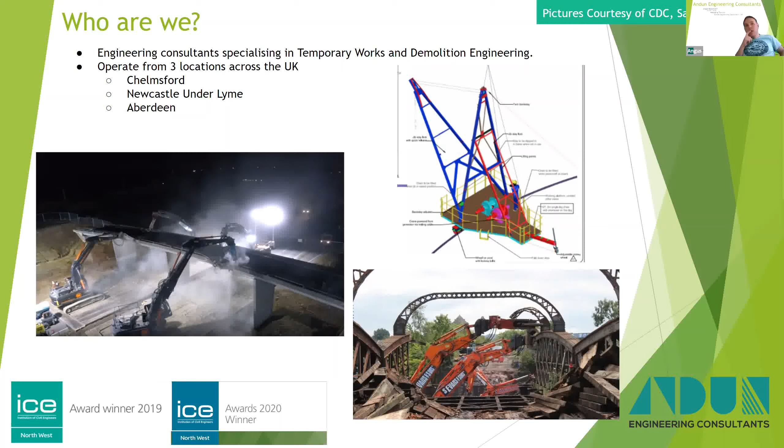So bridges, they can be from something a metre in span, which is probably more like a culvert realistically, to structures over a mile in length. We've never taken down anything a mile in length. We've done structures up to sort of 250 metres long, viaducts generally. When you start getting the bigger single span structures, you either take them apart the way you put them together, or you use explosive demolition. But we haven't been involved in anything that size yet.

The materials bridges are made from can dramatically impact the way in which you demolish them. Just looking at concrete, you've got precast sections, which started appearing in the 50s, 60s, 70s. You've got in situ concrete, which can be mass concrete or reinforced concrete. The first mass concrete structure I can think of, well, if you're not looking at bridges specifically, go back to the Pantheon. But if you're thinking bridges, you've got things like the viaducts up on the Mallaig line in Scotland that McAlpine built. That was done in mass concrete and is still in good condition because it doesn't contain any reinforcement to corrode and start the destruction of the concrete.

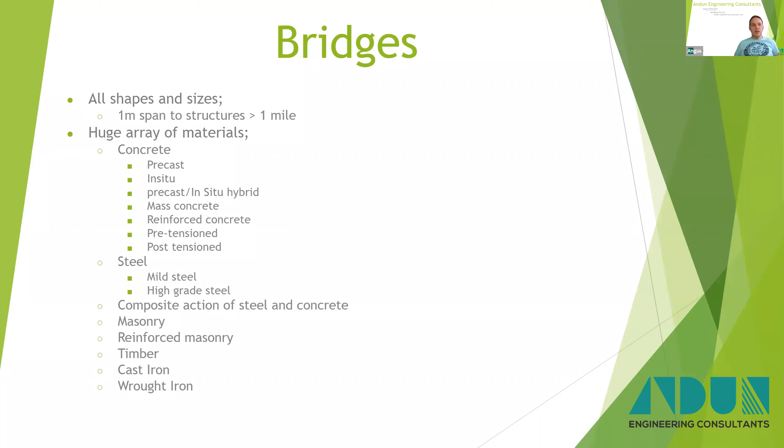Now, the constraints. This is just a little list I put together today thinking about what sort of things affect how we come up with the demolition methodology. You've got railways over, under, road over, under, rivers - I haven't even put that on but I have it down the bottom there, river underneath it. The height of the structure, so that has two effects.

One of the case studies shortly is a structure that's very, very high up in a cutting above a railway line. If it's normal height, say 5-6 metres up, you can use normal demolition methods where you protect the track, bring a machine in and demolish the structure. If, for instance, the structure is 20-30 metres above the railway line, it becomes a different question how you demolish it, and indeed how you would protect the railway when you're demolishing it.

If you've got lumps of rubble dropping 20 metres, there's an awful lot of energy to dissipate before it hits the crash deck. The condition of the structure can have a massive impact on how we demolish it. If the structure is in a condition where you can drive on it with plant or vehicles, then perhaps that makes it easier. If it's in such poor condition that it's failed or is failing, then you've got to come up with another way.

Time, particularly with rail jobs, there are huge penalties if we overrun our possessions - that's the time we're allowed to work on the railway. So the methodology can often be dictated by the speed in which we need to complete the works. Similarly with a road closure, there's only a certain amount of time we can close a road for. The time of year matters too - Christmas, Easter, August bank holidays, May bank holidays are traditionally when we can get these road and rail closures in place, but it's a limited time.

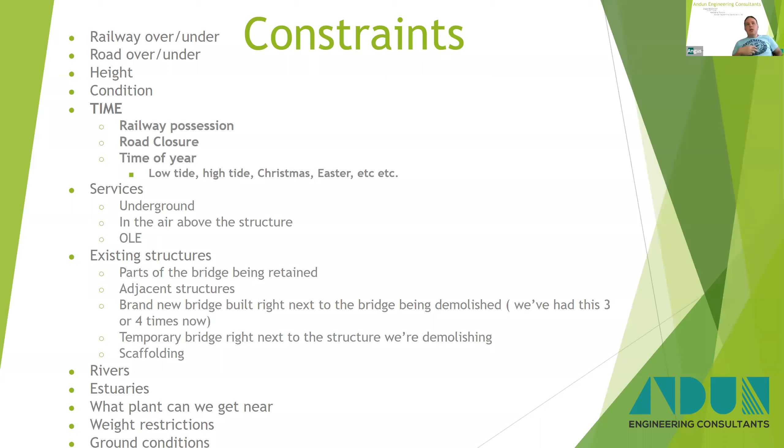When I was going back through looking at the bridges we've done, I thought this one here, Langton Court in Bristol, is quite a good example of constraints and how it dictated the methodology. In fact, it's the best one I could see, really. This was a fairly small job, and if it had been in a better location, it would have been really quite simple. But we had a lot of constraints.

The first constraint was high voltage cables, which went directly over the top of the structure. The next is the height above the railway - I think we were about 30 meters above the railway here. You've got a railway underneath it, a set of points or switches underneath it, and signalling apparatus underneath it. It's also in a residential area with fairly narrow roads, so the approach and access for plant was far from ideal.

I meant to add at the beginning there, we were working for Sam Gilpin Demolition on this scheme, who were in turn working for Hochtief.

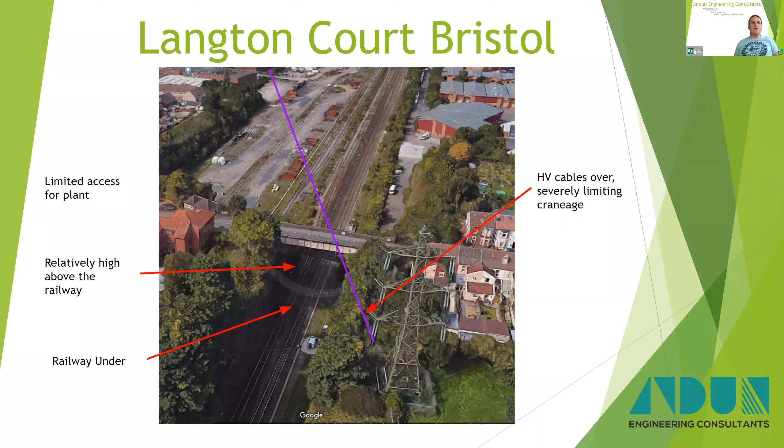So looking at it in plan, the pink dotted line is the high voltage cables and the associated exclusion zone. And the only bit we were moving was the steel walkway here.

This steel walkway spanned from a support here to a support here, and we could only get small plant near it. So the scheme we came up with was to put supports on the bridge itself, on the masonry arch, and suspend and hang the steel structure.

So in cross section, we've got a masonry structure that this is sitting on, and then we had this steel footbridge projecting. Now, if we could have got a big crane near it and there were no high voltage cables overhead, it would be easy to pick it up and move the bridge in one piece. But we couldn't, so we suspended it here.

Fairly lightweight structure, but still heavy enough, given what we had to do. So we put these supports in first, suspended the steel deck, and then cut it apart in a controlled manner that was all analysed and demonstrated to work.

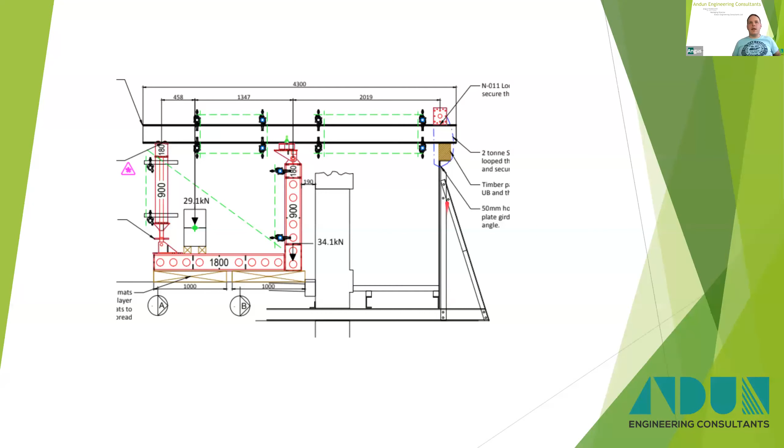If you go back a phase, you can see you've got an edge parapet beam there, which was formed out of steel plates. So you had angle at the top, and angle and T-section at the bottom.

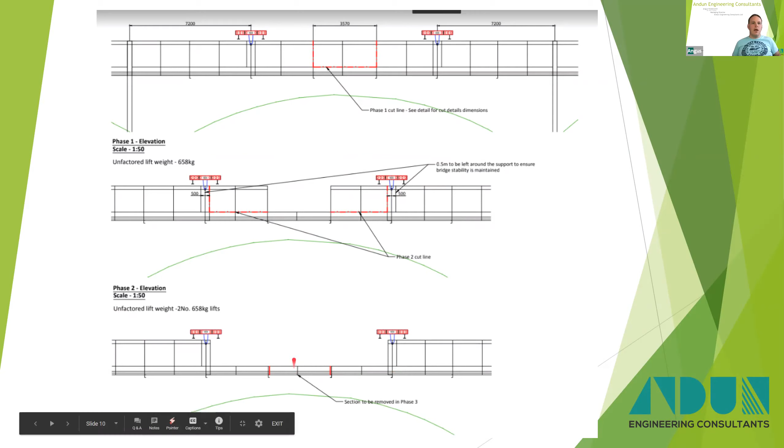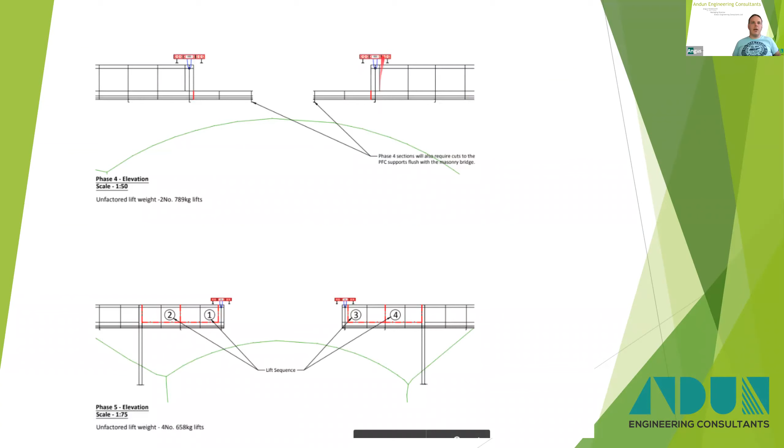So we could cut it out, and we left the bottom section spanning across and took the top of the panels out. Then we lifted out that section and the next section and so on, until we worked our way back to the bridge being supported here and hanging from the hanger there, as you can see. Then we lifted the final pieces out, working our way back.

The sides of the cuttings were remarkably steep, but they were into competent stone, so we could put a little support in there and complete the demolition sequence.

Though it probably looks a lot easier on paper than it did in practice, it really was quite a tricky little scheme, with access problems for the site teams to get in and undertake this burning in a safe manner. So it was quite a tricky scheme, really.

But it gives a good indication of constraints and how they affect the demolition methodology and how we undertake the works. So let's leave the constraints for a minute and look at the methods that can be used.

Broadly speaking, there's cut and lift, traditional demolition, or explosive demolition. So if we start off with cut and lift, the mechanisms or systems we can use to cut material...

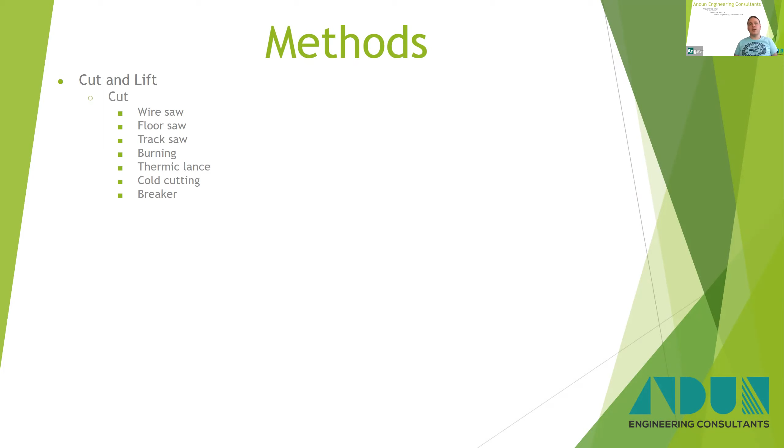For concrete, steel, cast iron, pretty much any material you can think of, you can use a wire saw, a diamond wire saw. Other brands are available, but this is a Hilti one, and the wire itself can be changed to suit the material you're cutting.

As I said, you can cut pretty much anything you want, typically used on mass and reinforced concrete, and they give quite a nice, neat cut when they're done, though they are not without their issues.

For instance, if you're cutting longitudinally down a beam, it will tend to take the route of least resistance and follow the reinforcement rather than trying to cut through it. So depending on the accuracy of the cut you're trying to achieve, that's worth bearing in mind as a permanent works designer - we need some tolerance when it comes to demolition.

Especially if we're trying to retain part of a structure, these things are good, but they won't cut a dead straight line every time you want.

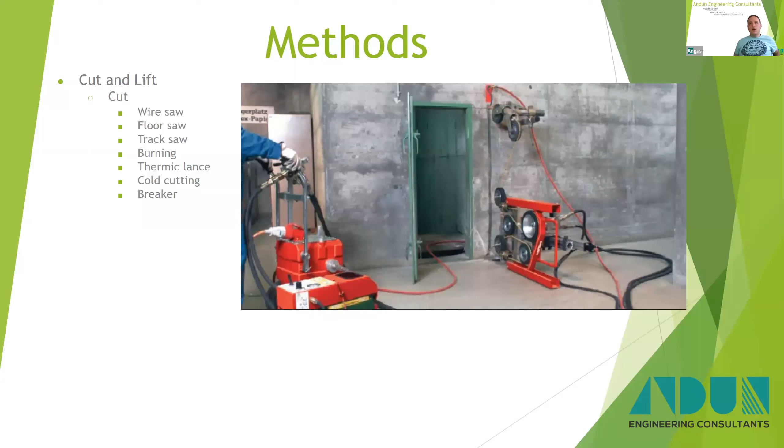Floor saw - I think this is the biggest one in the country, or Corecut claims the biggest one in the country. It's just like a big circular saw, but for concrete. It's a steel disc with diamond tips. Again, this will cut steel, reinforcement, concrete, and it'll even cut cast iron - yeah, I've seen it done. You've got a dirty great engine on there which drives this wheel as it's going along.

You spin the wheel up and cut down into the concrete, working your way along. The maximum depth it will cut is obviously from that centre there to here. If you need to go deeper than that, you're into wire saw cutting or some other means.

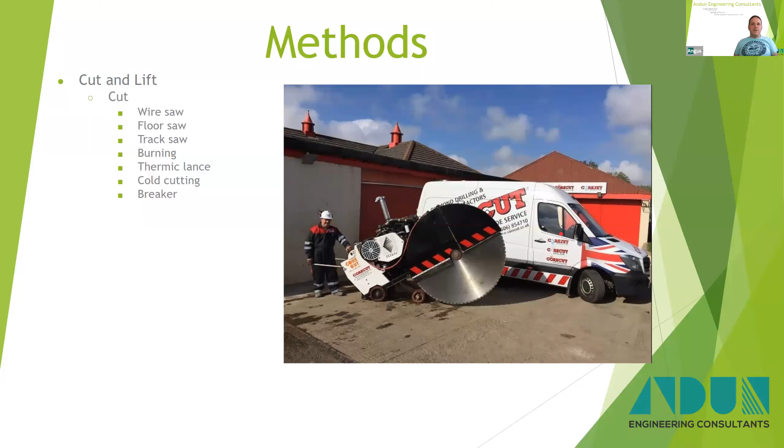Track saw is fairly similar, except instead of running on a wheeled system like that, you put a track down and run the saw along it. This one's got all the bells and whistles, so it's remotely controlled - the guy runs it from here, and it works its way along the track, cutting as required.

Hot cutting, so burning - this is burning through wrought iron by the looks of it. Given the construction it could be mild steel, wrought iron - say wrought iron given the construction. You can cut through wrought iron, you can cut through steel. You will struggle on cast iron.

You obviously won't burn through concrete with a gas axe, but that allows you to hot cut sections pretty much where you want. You've also got to be able to get there and gain access to do it in a safe manner, but generally speaking that can be arranged.

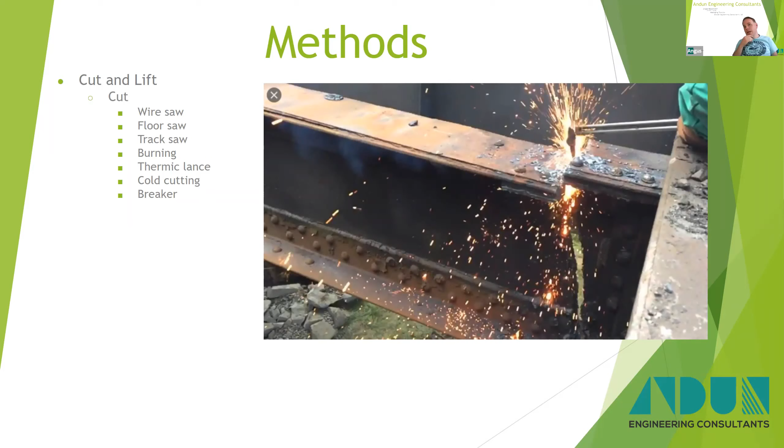Next one, which you don't see very often, is the thermic lance. Preheat the end - it's full of iron or mild steel tube. Inside it you put iron, magnesium, or aluminium wires, and you blow oxygen through. Once you heat it up at the end here, that will catch fire.

That will burn through anything you can think of - you can burn through concrete, cast iron, steel. You can do an awful lot of damage with a thermic lance, though they are messy, and the smoke that comes off them is horrendous. You don't tend to see them very often, but when you do, you really need them - they can do things that other systems can't even touch.

Also got cold cutting on the list there, but I couldn't find a good picture for it - things like recip saws and the likes with the right blades to cut. With those, you can cut steel quite comfortably.

If any of you watched last week's webinar on the gas holder demolition at Battersea, that was actually all cold cut. There was no hot cutting - there's tools available that allow you to slice a steel structure up quite happily into pieces with cold cutting, a combination of wire saws, handheld recip saws, and even handheld circular saws with metal cutting blades. Depending on what you're doing, it is available - so if you're in a situation where you can't use hot works, there are options for you.

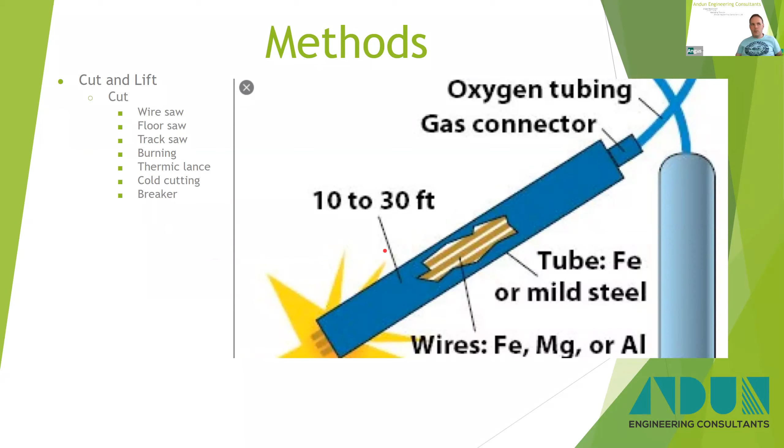And a breaker, I suppose, a breaker can go in there. Quite often if we're lifting out a concrete section, we need to get a breaker up there just to release the end. It could be a precast beam that had an in situ stitch or something similar, so you just break out the in situ stitch at the end, or around the abutment - it might have been in tarmac or whatever else. You might just need a breaker up there to tickle it free, shall we say.

And to reduce your HAVS, which is the vibration in your hands, you can use a Brokk, or you can do it manually with a breaker if you deem it's okay. There are options, or you can even do it with a large piece of plant.

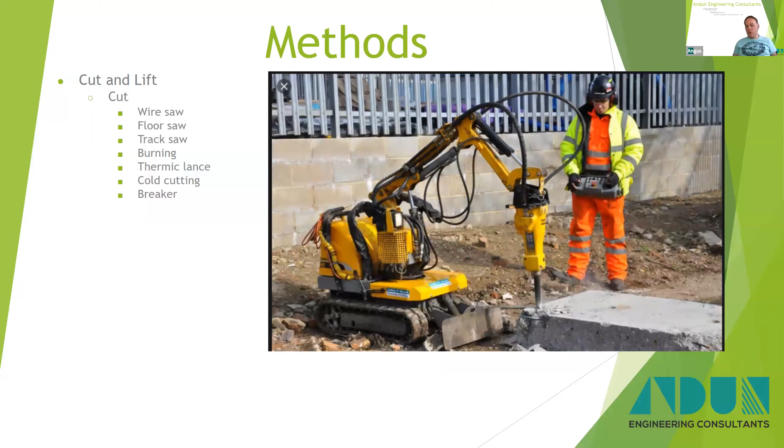So we've done the cutting side of things - what about the lifting side of things? There's any number of different methodologies available now for lifting things.

We'll start off with a simple one - that's a mobile crane, and that was at Twickenham station for Econ and Osborne, taking out the old footbridges and station bits and pieces. If you go there now, you wouldn't even recognise where that picture was taken - there's been a dirty great new station and mixed development built over the top of it, which has drastically changed the area.

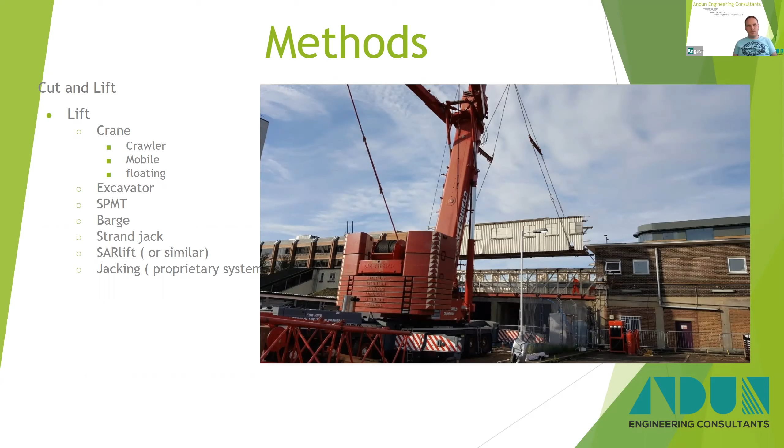Crawler cranes - that's CDC in Widnes taking down an old bridge that was made redundant by the new crossing up there. Again, a little crawler crane - that crane there can lift 100 tons, and at that point it's lifting 25 tons at something like the 20-meter radius. So they are real little pocket rockets in terms of the performance you can get out of these machines.

All self-rigging as well, so you haven't got to mess around rigging up the boom. Simple use of a propping system we put in there to allow to reduce the weights so we can lift it comfortably.

I couldn't really find a picture of a floating crane that made any sense in the demolition context, but you get the idea - you can put these on pontoons, etc.

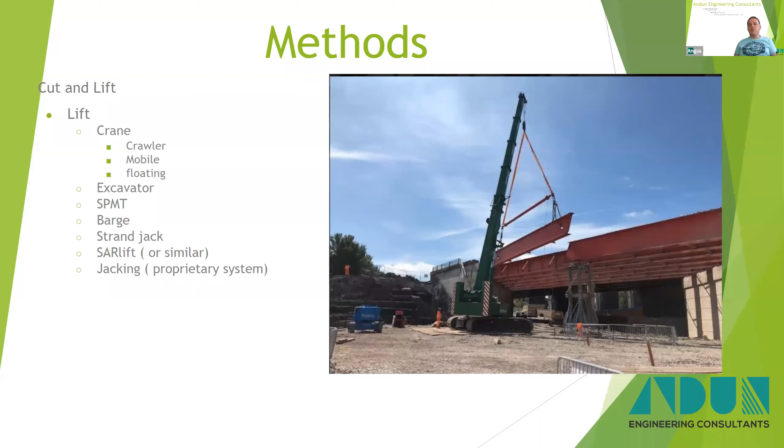And excavators - there's a little video coming up of an excavator being used for lifting, so we'll skip that one for now. SPMTs, self-propelled modular transporters - that's these kiddies here. So they're quite awesome bits of kit.

I think I've said this before, but if you've got time, just Google SPMTs on YouTube and have a look at the performance and what these things can do.

Here, this is Liverpool Churchill Way Viaduct, where we were taking out 2 spans in one. So you can see we've got a pair of SPMTs, and then we've used just a plain bed in between to lock them all together.

In this case, it was Sarens, and that's typically who we've worked with. There are other providers of SPMTs and all this propping gear, but we've worked with Sarens, and they're good guys to work with. They get the job done. They've got a good engineering team.

So that's SPMTs. Well, actually, I haven't really explained what they do. So in that case, you've got the bridge section sitting on top, and it can just drive out. In this case, it drove towards us on the screen and then drove to the left, or my left - not sure if that's your left. My brain can't think like that at the moment.

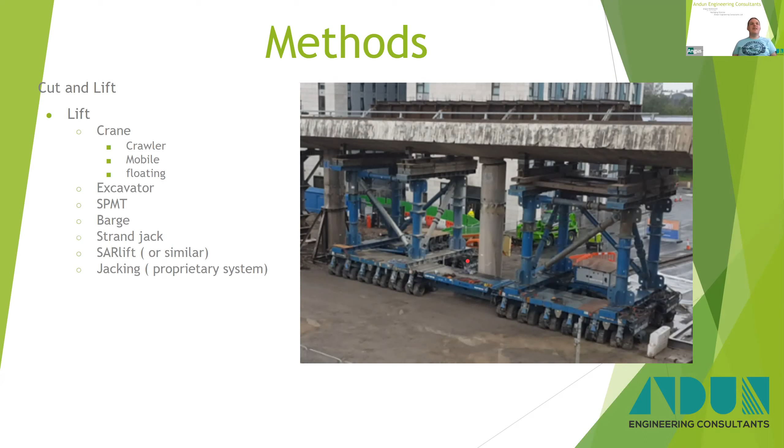Again, I put barges in there, but I couldn't find a picture. What I meant by barges is if you used a pontoon or a barge and you put it in underneath a bridge with packing or a jacking system on top, you could use the action of deballasting the barge or the pontoon, or you could use the tidal variation on a river. Though using the tidal variation on an estuary could be tricky because tides come with flows, so you'd have to make sure it was moored in place. But you could use that action to lift a bridge for you without cranes or similar.

Strand jacks can lift massive loads. I can't think we've ever used one on a demolition project, though I'm sure people have. Quite often used when building bridges, used a lot in oil and gas for moving heavyweight materials around.

SARlift, again this is a Sarens product. This is again at Liverpool Churchill Way, where we used it to jack up and down the bridge sections. The SPMT is driven in here, and then we lift it off, drive the SPMT out, and then drop it to ground level. Now in here, you've got a jacking system that allows you to raise and lower as required.

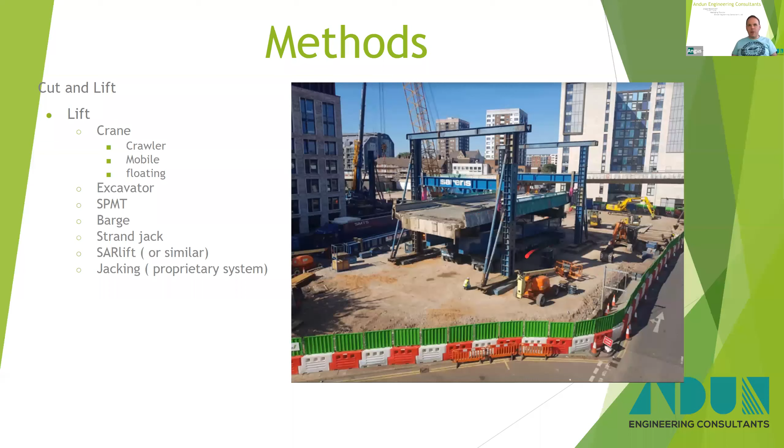They also have jacking systems, which is similar to this, but this comes with a tower built and the jack moves up and down inside it. With this system here, you jack up and you put another cassette on, and you can jack up and down a structure. Same kind of similar principle, but all of these things are available for lifting and lowering of structures.

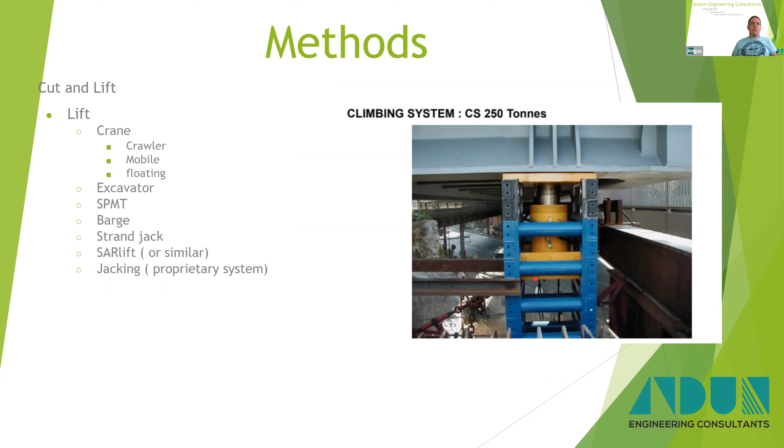This is - I talked about using excavators to lift things. This is a good example. I apologise if it doesn't look very good in terms of the quality, but that is my internet connection, I'm afraid.

How's that looking, Chris?

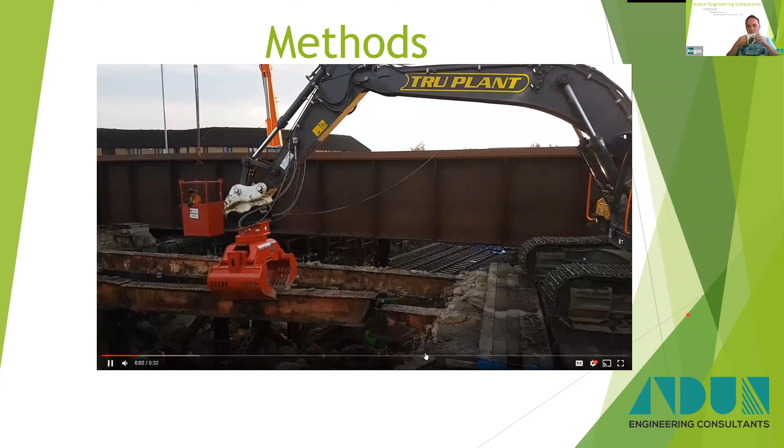Is that looking good, Chris? You're muted. Oh sorry, I thought I'd clicked the button. I was saying it's a bit jolty, but I think we can see roughly what you're trying to show, if that makes sense.

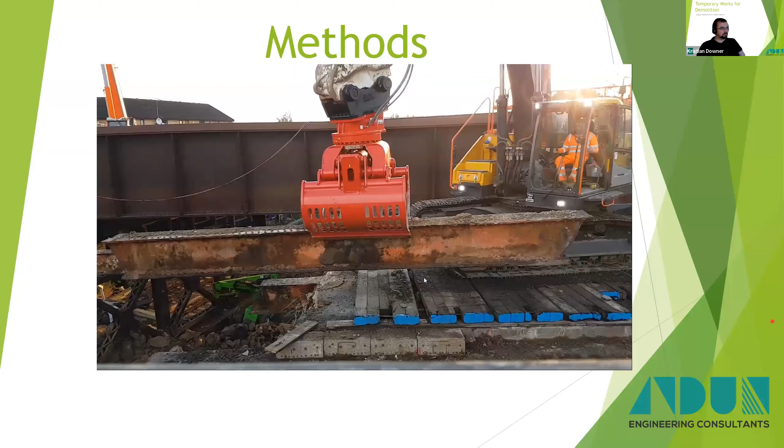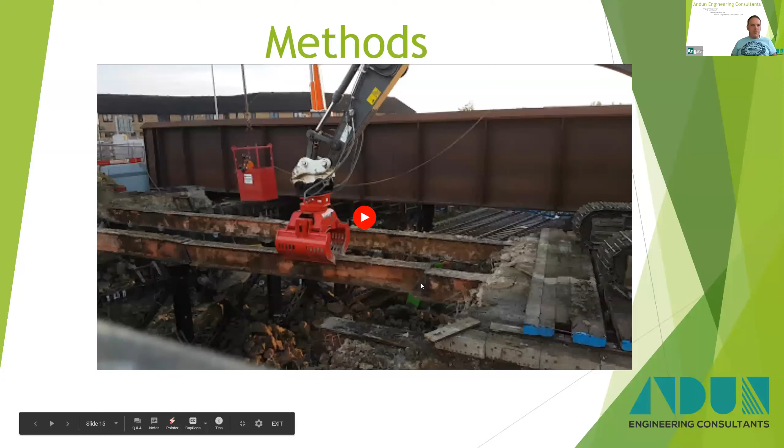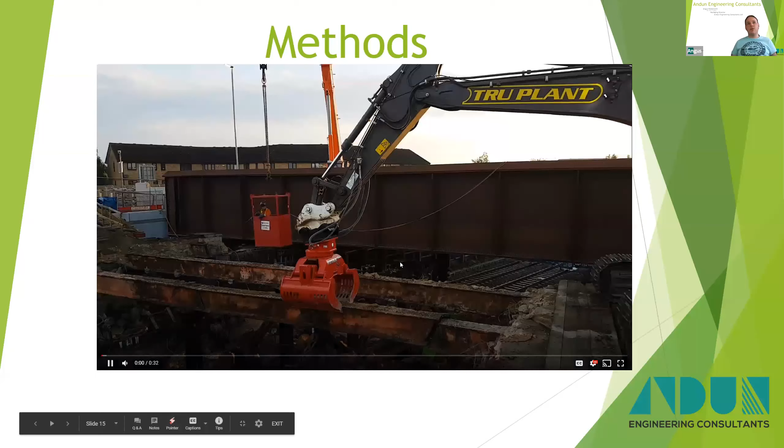So that was a rotor grab, on a 35 tonner, here on the other end of the beam, and then we're lifting out of the grab. Could have been done with chains, but in this case a grab was the correct solution. You see the guy in the background in the man riding basket. He actually did the burning from the man riding basket, which is quite a slow process, but given the constraints, there weren't many other options as to how we could do it. You can see it quite nicely held and dropped into position.

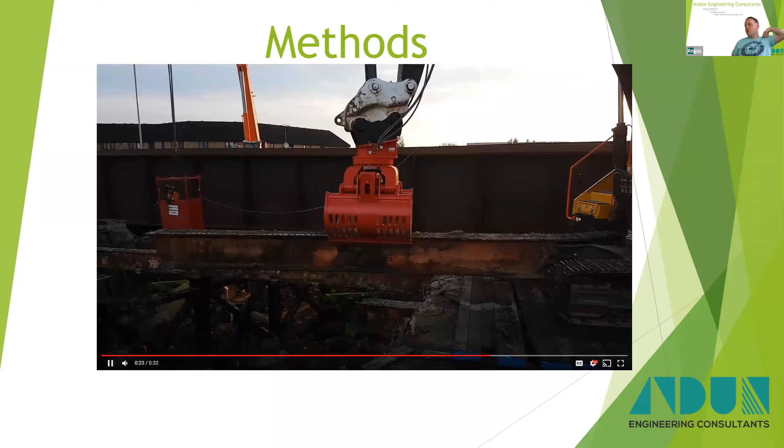So traditional demolition now, what methods have we got? If you're talking about steel structures, you want a dirty great shear like this. Some of these big shears can weigh up to 15 tons and they can pretty much go through anything you can get the jaws round. Incredible bits of kit. The shears we have available now, you can even use them on concrete, though it does wreck them, but sometimes to get things done, that's what you do. There are plenty of companies in this country who run shears, and there's some that run the massive great shears and can tackle pretty much anything.

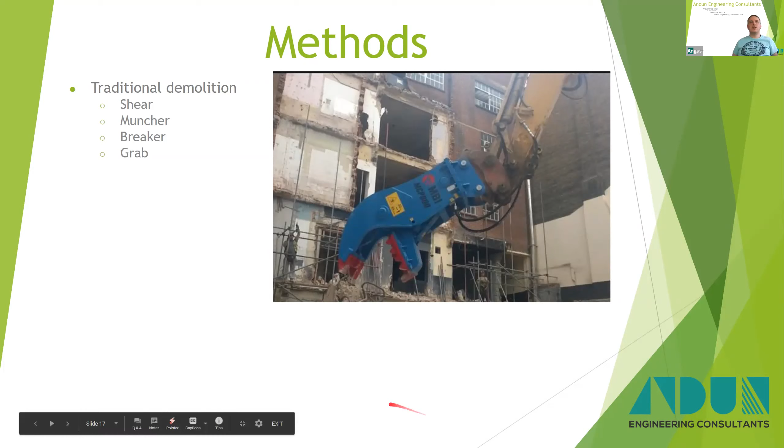Muncher, they're designed for crushing concrete, masonry, that sort of thing, generally speaking. Breaker, which is a big steel point on the end that impacts into the concrete and simply pulverizes it.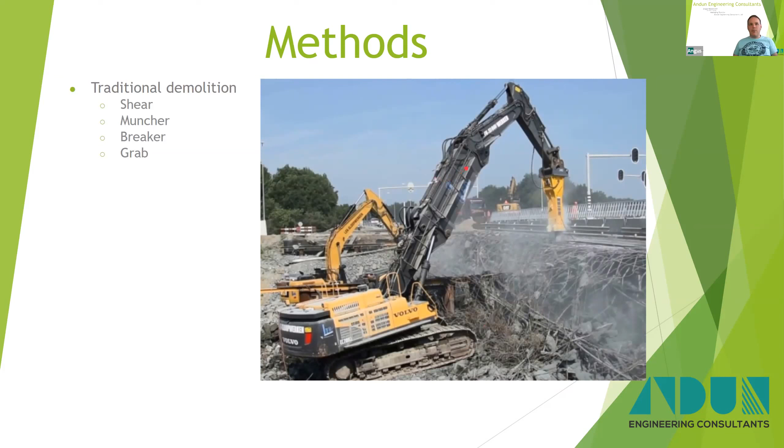And then we just saw a grab. There's a grab being used again to lift out a beam on the same bridge, actually.

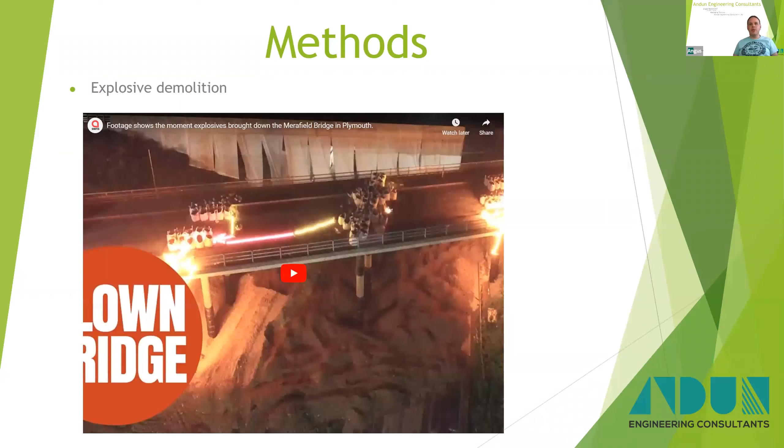And then we come on to the final general method, I would say, explosive demolition. If these aren't looking very good - you can find all of these videos on YouTube, not all of them, but most of them. This was Gilpin demolition on the A38. So you can see there the explosives being used to blow out the column heads and blow out over the abutments, and the whole bridge just drops to the ground.

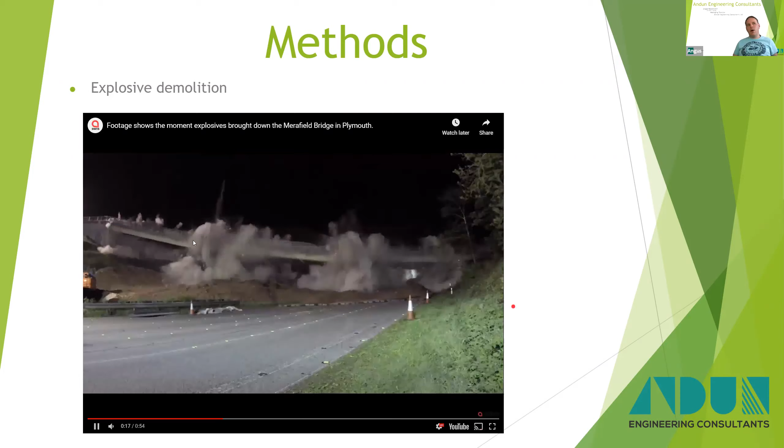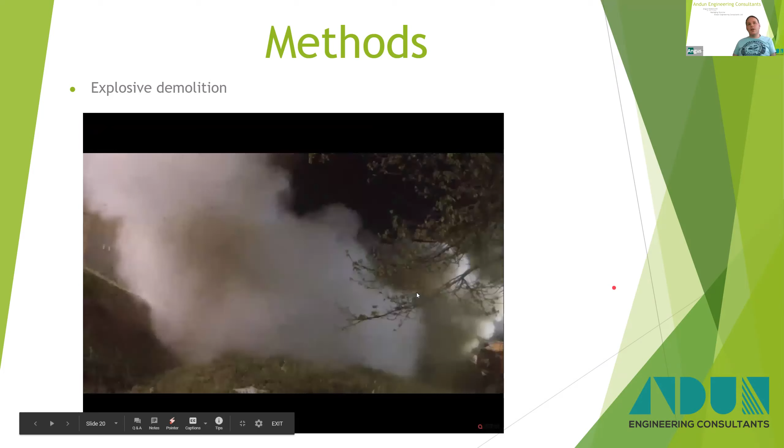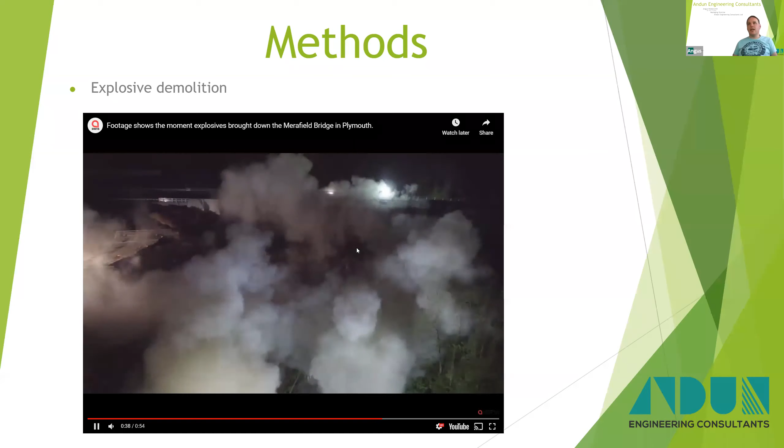Yeah, that one's a little bit easier to see, Angus. Good, so you can see all the bits and pieces. That's what we call flying off the deck. There's not a lot you can do. They've tried to protect the areas where the explosive is. You are always going to get some fly, so you've got to have exclusion zones in place. The benefit with explosive demolition is that the deck is dropped on the ground very quickly. You still got to break it up once it's down.

On that scheme we didn't do the explosives - that's done by a specialist contractor who actually installed the explosives. We did the protection to the A38 there to make sure that wasn't damaged.

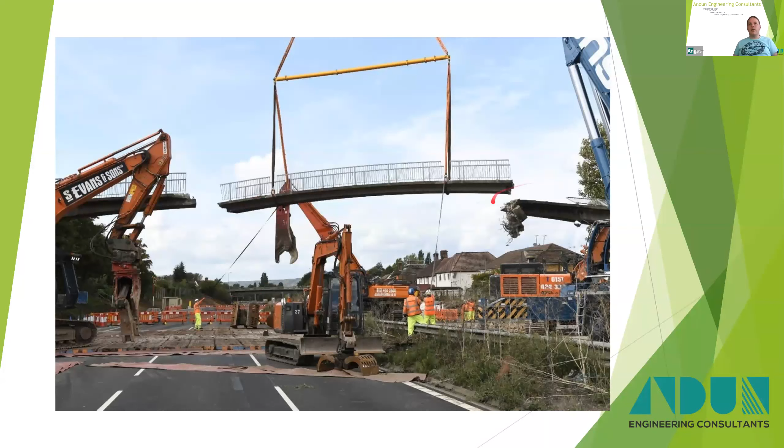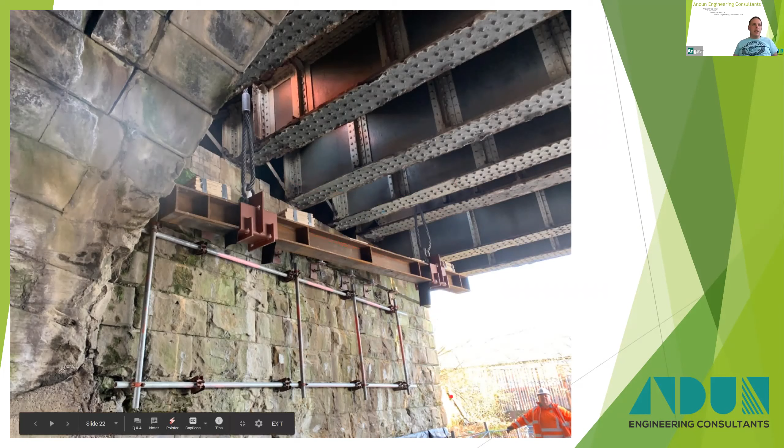I'll put that picture in there twice. I liked it so much, clearly.

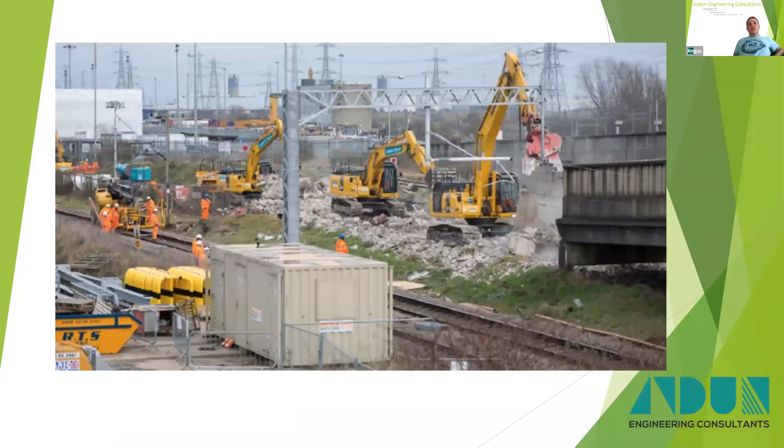This is a good picture of traditional demolition, I would say. So this is John F. Hunt at Barking Riverside, taking out one of the old access ramps that came down to facilitate the redevelopment of that area. Again you can see a 450 there running at a muncher, which they use just to pulverize and break up the concrete in a controlled sequence.

So, how are we doing for time? Not too bad. Okay, so now we're going to move on to some case studies, some small case studies.

Now this is Loughor Viaduct, where we were working for Sam Gilpin. I think this was back in 2013 - yeah, it was 2013, so this is a blast from the past, this one. And it was actually quite nice going back through the archives and looking at this job. I've forgotten quite how interesting the scheme was.

Loughor Viaduct was built or designed by Brunel, and was in service till 2013 with modifications throughout the years. Trestles were improved, but the original wrought iron construction was fairly early. Actually, I tell a lie - the trestles remained from Brunel, the deck was replaced at a later stage, and then it was in operation until 2013 when it was removed by Sam Gilpin.

Timber trestles supporting wrought iron decks. You've got four main members which were pretty much directly underneath the rails, and a ballasted timber deck - that was the structure. So that was a typical span.

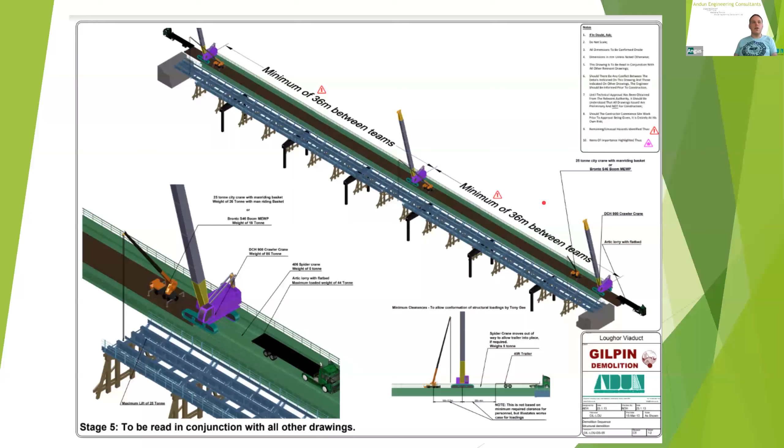In plan, that's basically what we did. We started the teams, one worked that way, another worked that way, and once the first span had come out, we then worked our way back east. Everybody was working east, taking out the structure, keeping that separation in place, and to maintain stability we used some Tirfors - quite a simple solution.

You might be wondering why we decided to take out the structure starting from the abutments. The answer is we didn't want to - I really didn't want to do that. However, Carillion needed to do preparatory works on the abutments while we were demolishing the bridge to meet their possession timescales. So we had to increase the risk involved with the demolition by removing restraints at either end, and work it in three individual sections, with stability maintained by tying to the permanent works.

One of the reasons this structure was being demolished was concerns over lateral or longitudinal stability. So it really wasn't ideal to have to do this, but we came up with a solution that allowed it to be completed.

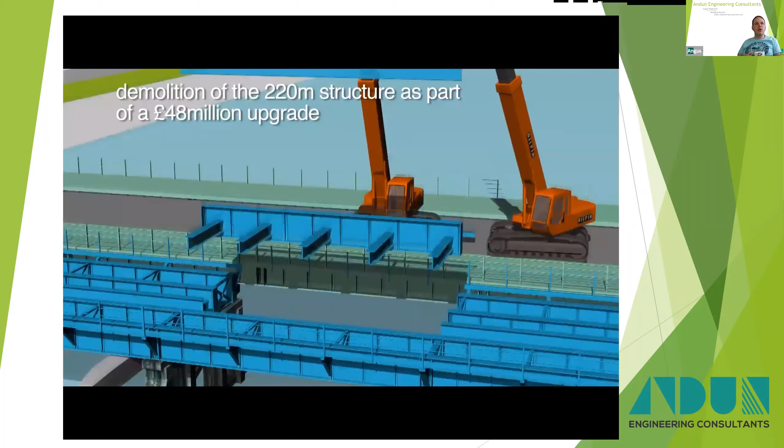So that's the new deck they're standing on. That's the old deck you're looking at there.

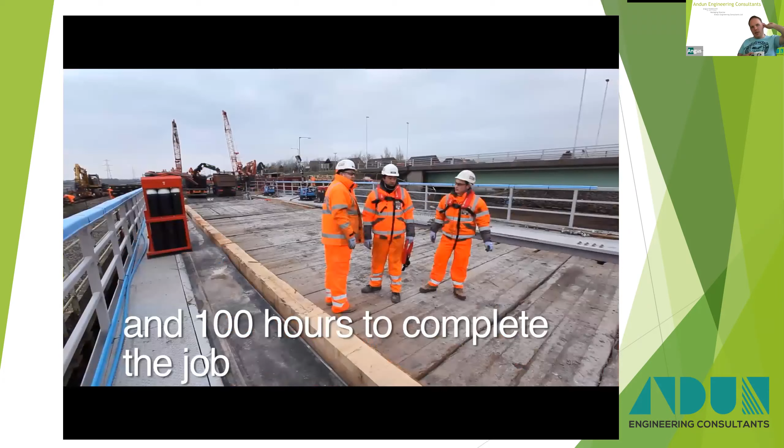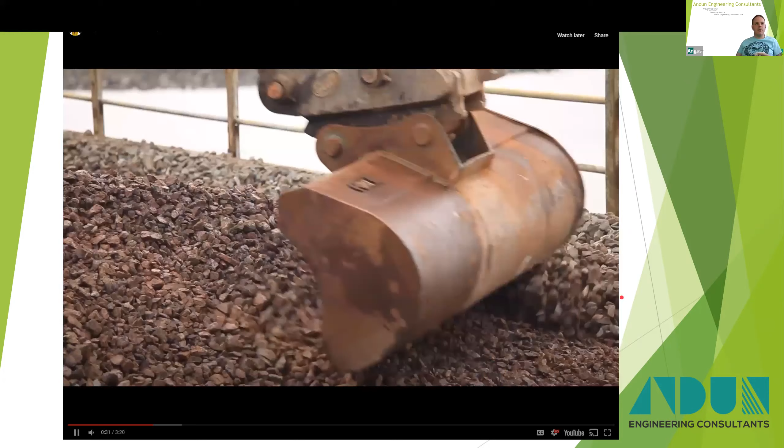First stage taking all the ballast off. And when I say that bridge was manky, I mean it was manky. We went underneath and did an inspection of that bridge prior to demolition, and it was bad - you could put your hand through the webs.

We've been in demolition for nearly 30 years, so it's been a natural progression from knocking down buildings and sheds in the quarry industry. We've evolved into the rail industry and specialised in bridge demolition and the marine aspect of demolition as well.

It does end up being a little bit of a Gilpin advert, but you still get to see some quite interesting bits on this scheme.

We're just about to start burning out the first girders now.

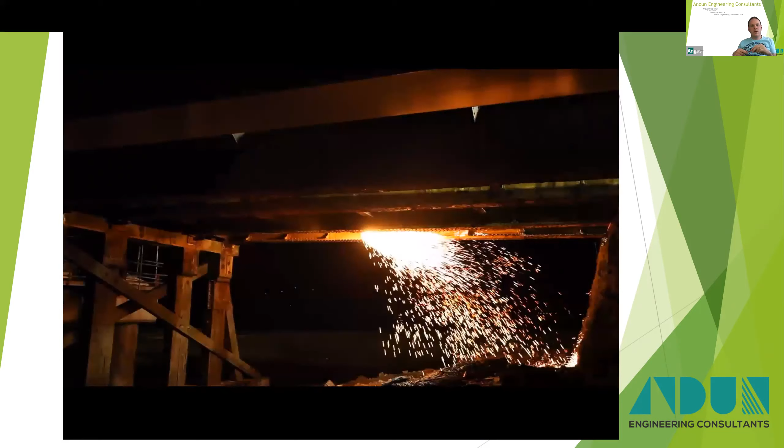Calculated by us, and it was about 10 tons, which was good.

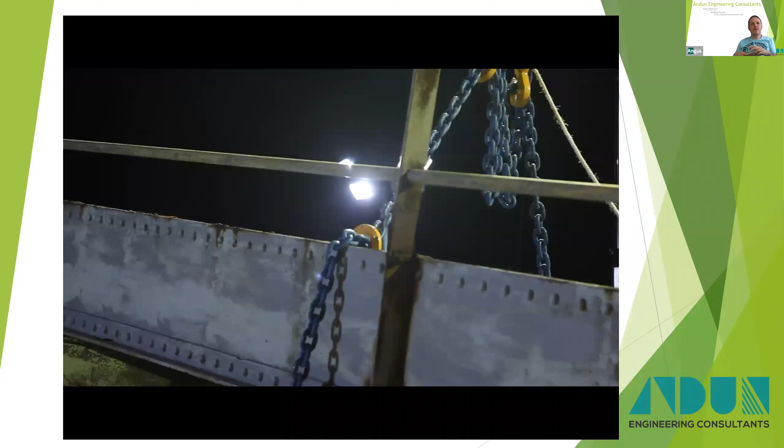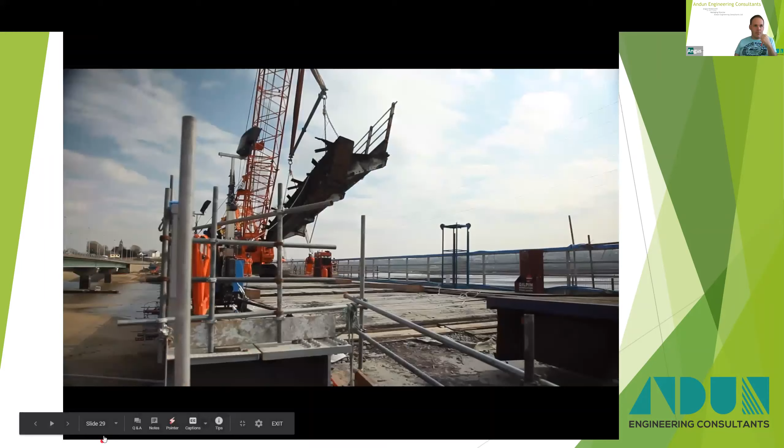So some of the sections were dropped onto barges, where we had the right tides.

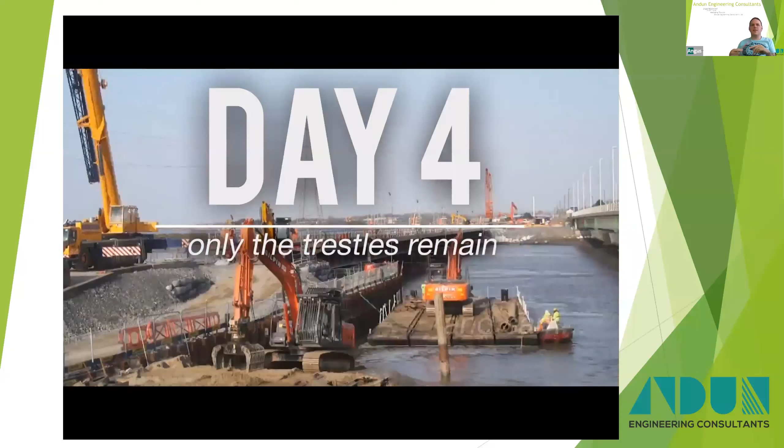You get an idea of how busy that site was when you see these views here, and how well they did to get that job done in under 100 hours. I think they finished 20 hours early - 25 hours early, there you go. Which was really some going, given the job they had to do there. And you can see the new bridge being slid into place.

It really was a good project. Now we're going to move on to a more recent one. I think this was 2 years ago this weekend - or it was last weekend. It was the bank holiday weekend 2 years ago we did it.

So Ardleigh Green we were working for Clarke Demolition, who were in turn working for Hochtief. The project was to install 2 new bridges on the A127 and a new service bridge. So at this phase here, the new bridge, the first span's gone in. The bridge used to extend this way - that had been demolished in the previous phase. And then the new bridge had been installed, and now we're going to repeat. So the old bridge comes out and the new bridge gets put in place.

So this was an interesting structure - wrought iron trestles, fabricated beams, steel beams, and then mass fill concrete over jack arches. In this case they were reinforced, but what we mean by jack arches is it spans from bottom flange to bottom flange of a bridge, or not necessarily a bridge - you see it in old buildings as well. So it's a little masonry arch structure sitting there. And on the far side, you have precast - I think, or they were in situ, I can't remember - they were trough units anyway that sat on the bottom flanges. And then you had masonry up here and a hoarding on this side.

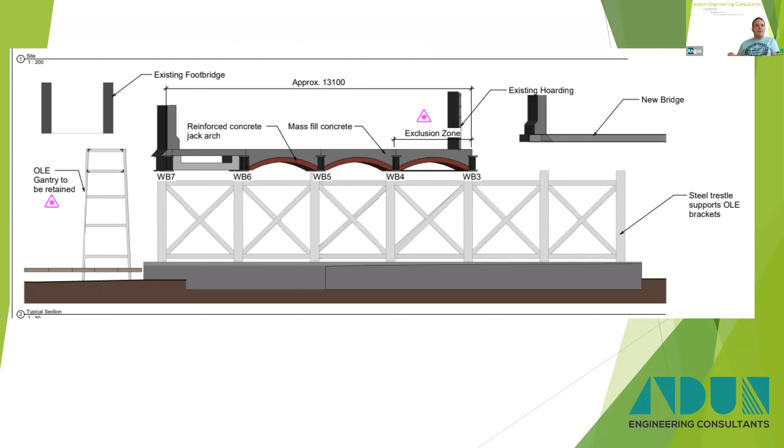So I think a lot of people see demolition as easy - you just knock it down, you don't really have to think about it. You really, really do have to think about it, from the phasing, the machine, how the machine can reach, how the machine can sit there. Does the bridge remain stable while it is sitting there? There's all sorts of things that come into play. And as an engineer, you really have to think about it. It's one of the reasons I enjoy bridge demolition - the technical challenge and the sequencing and logistical challenge that comes with it, and working with the demolition contractor to come up with something that works for everybody. So this site had some additional constraints.

So they built the brand new abutments directly behind the old abutments, which meant we had a 3 metre gap to try and get across to demolish the old deck. We had the new bridge fairly close to the old bridge that we were demolishing. And as I said, we had the jack arch structure.

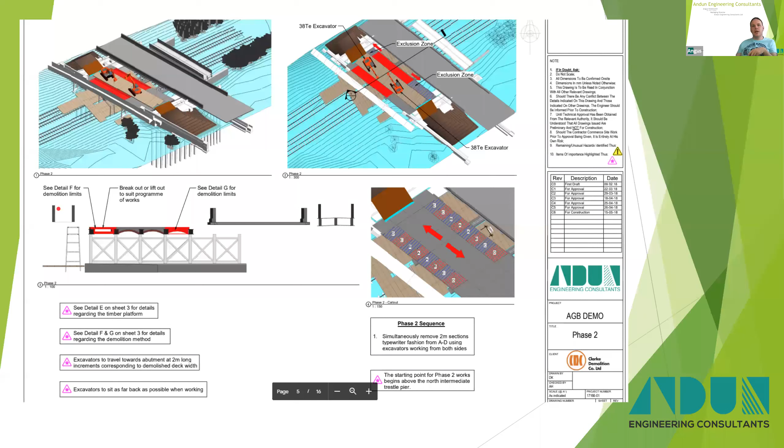So we came up with this system where we'd lay navvy mats down with packers on top of here, so you're loading directly over the steel beams, so you could track down and break out either side of the structure, and then work your way back, taking out the centre span. So before that, you lift out the steel beams either side. Again, working out weights, checking that the machines could reach and can actually lift it out.

So we go into the detail of every cut, so you know the weight, where they've got to cut, how they're going to sling it, or in this case, they actually picked it up with the grab.

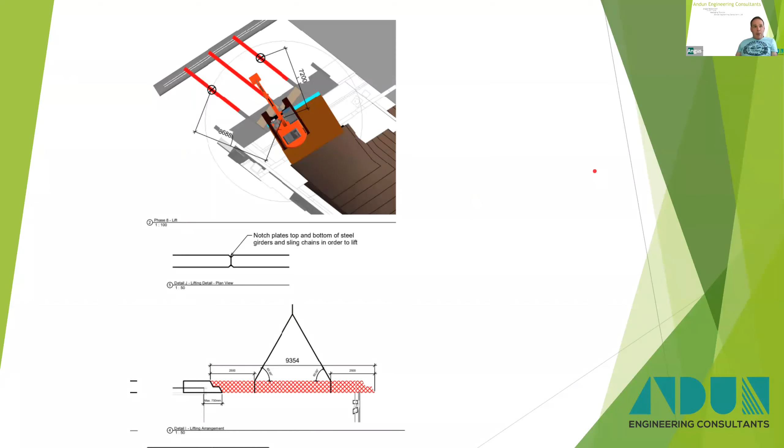And to the rear of the abutment, as I mentioned, we've got the new abutment for the brand new bridge that was going to be put into place - it was actually slid and launched. So we had a 3 metre gap, about 2 metres deep. We had to try and bridge to get, or we somehow had to cross to get in there. Now that had to be something that could be installed easily and didn't cost a massive amount of money, because as always, there was no budget. No one had foreseen this issue.

So we came up with a system of a simple navvy mat bridge to allow people to get over and down onto the deck, and that could be lifted out very quickly, which allowed the final part of the bridge to be demolished. Quite a simple solution, but it needs some thought as to how you get there, how you install it, and how it can be taken apart in a simple manner.

Here's a little video of this bridge being demolished. This is the official TfL video, so it goes through the whole thing. This is from 2 years ago, from about 3 o'clock in the afternoon. If you keep your eyes peeled, you'll even see me standing over here somewhere. So you can see, just getting ready to go.

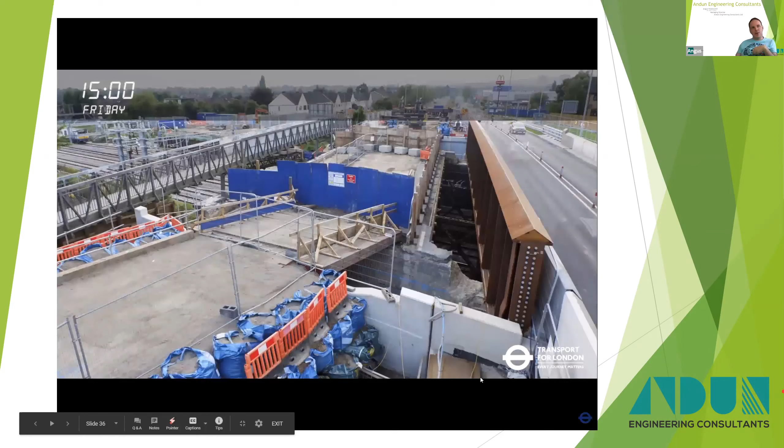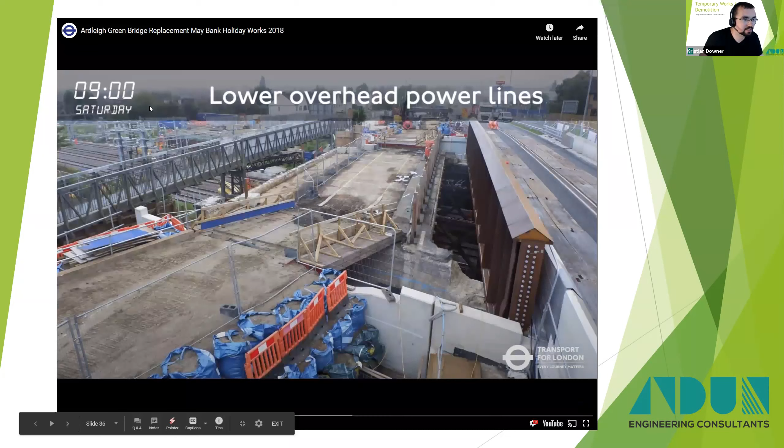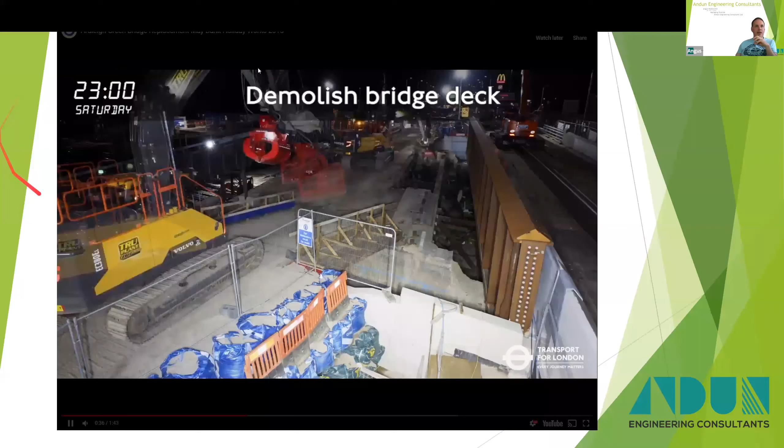You can see the bridges in place there, same on the other side, navvy mats going out. I'm keeping my eye out for you, Angus. They've moved the camera now, so you won't see me now. You'll probably see me over here. In fact, it was the Saturday night I was there, not the Friday night. It was around here somewhere. I'm over there somewhere.

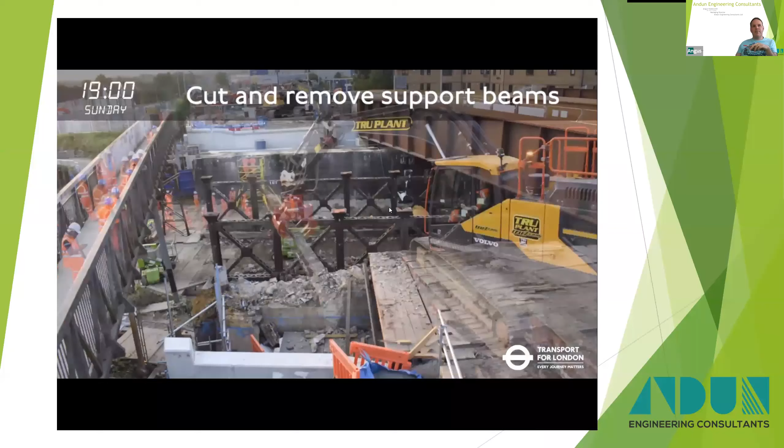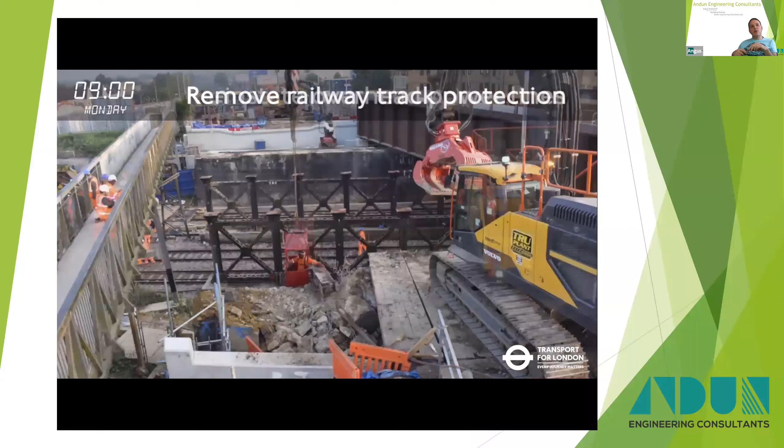But this went really, really well. Just a shame we weren't allowed to take the trestles out at the same time. We've now got to go back and take the trestles out from underneath 2 brand new bridges, which will be fun. It'll tidy it up, the ramps come out, new hoarding goes back in, job's a good one, and the OLE gets put back up.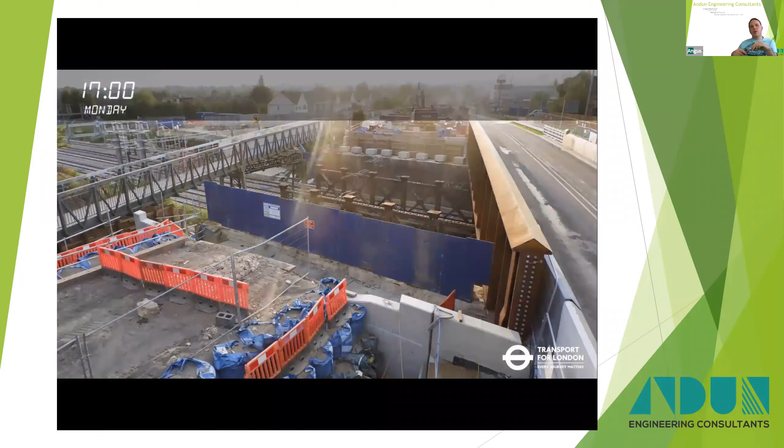And if you go there now, you'll see there's 2 of these bridges. In fact, I drove over it last week, all done and dusted.

So another one, Highbury Corner. Highbury Corner was done in, I don't know, 4 phases. The first 2 phases were Gilpins, and then the last 2 phases were Sam Evans. We worked for Hochtief, and the demo contractors were Sam Evans and Gilpins on this.

If you've been to Highbury Corner station, what you won't realise is it's over a bridge. So you've got the North London line and the East London line underneath, they run through there, following my mouse. And you've also got, which tube is it? It's the blue line. I can't think right now.

Victoria? That's the one, Victoria line that comes up across here, and you've got the ticket hall under here, and you've got escalators going down over here.

So all of this is a bridge deck, and it's a bridge deck that's been messed around with many times over the years. At this end, we had the original cast iron beams, and then we had steel or wrought iron troughing, and then we had cast iron again here.

This location here was actually the site of one of the worst V2 rockets in London. I think it killed about 40 people around here and blew down those 2 buildings there and another 2 over here. You can still see the remnants of that damage.

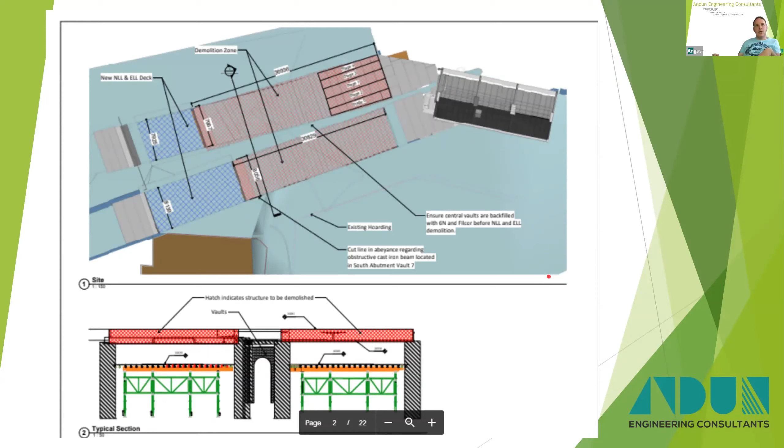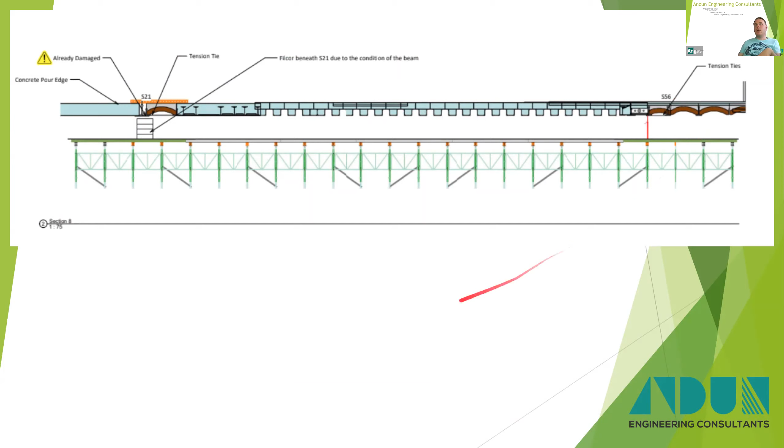So that's the long section. You can see here that the previous deck that was installed had one remaining jack arch this side. Then we had concrete surrounding beams, and then trough deck across here, and then back to cast iron beams going that way. It's a right old mishmash.

Inside the tunnel here you can see the deck in place. At the end here, we changed to aluminium beams where the deck is still in place above us - we didn't need to prop the abutments there, so there was no need to put super slims in when you could use a much lighter weight aluminium beam. But trust me, when you go along there, there were super slims - I know because I had to sign it off.

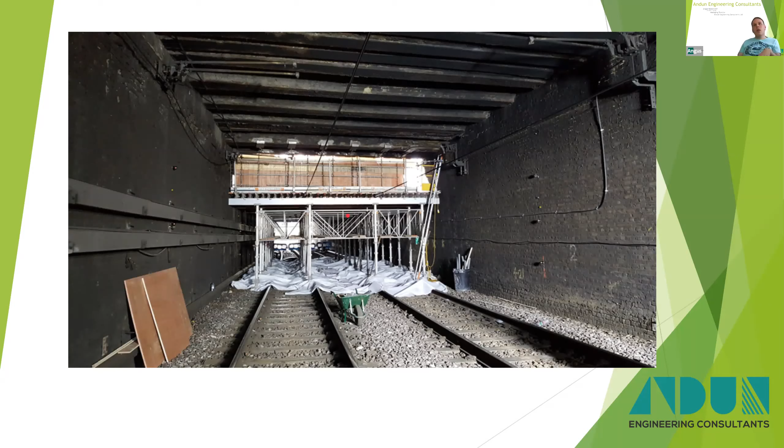And this is the view from above. It looks like absolute chaos, doesn't it? That's those two buildings we talked about - you're standing on the station effectively. That's the pub, and off to that side is going up towards the park area, if that helps anyone with their bearings. This is one tunnel or one bridge, and there's the other bridge.

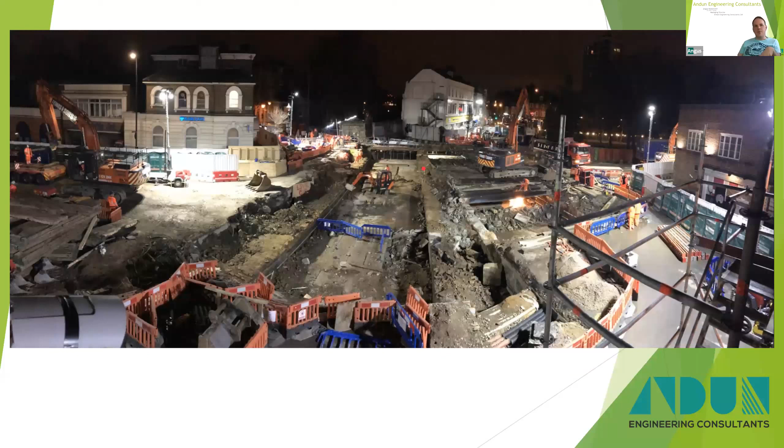You can see the masonry pier I talked about here, disappearing off into the distance, and you can see the deck there. That 5-tonner is operating on the deck in the tunnel bridge, whichever way you want to call it. And you can see a great 60-tonner there - they've almost finished taking the deck off at this stage. There's only the final stage remaining, and you can see they're cutting it into pieces and lifting it off with the grabs onto the back of a lorry and away.

You wouldn't believe that could become a finished bridge in not a great deal of time when you're looking at the chaos that's visible there. It just shows what's going on in the background of these projects in city centres, and this was completed over Christmas time, from the original bridge to the new bridge. There's a slightly earlier view where they just cleared all the surfacing off the top of the structure, and we're about to start the main structural demolition.

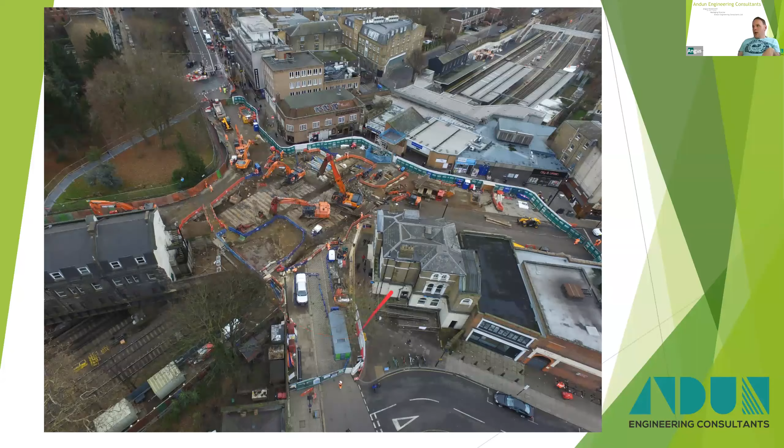I thought I had another pair of the bridge, but clearly I forgot. Right, 5 minutes to go, so I've done quite well time-wise on this. I thought I was going to overshoot, but it's all right.

So I want to add a little section here on pre and post-tension structures. I think I said this earlier, but people tend to get worried when they see pre and post-tension structures. There is good reason to worry about these structures if you don't know what you're doing. If you know what you're doing and can apply the engineering of these structures, then it can be demolished in a controlled manner, but they do need to be treated with respect. And it's vital you get people involved who know what they're doing with these structures.

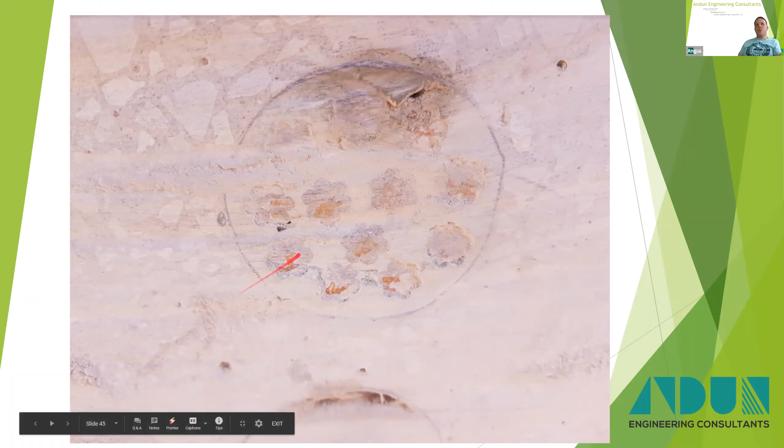So when we talk about post-tensioning, we're generally talking about a duct being installed within a section, and then you've got these tendons that are tensioned up and then grouted or not grouted. If they're grouted, in this case here, you can see we've saw cut straight through, and the tendons, which are under a huge tensile force, haven't retracted. That means the grout has stuck very well to the tendons, and that section is still under tension. So it's still working as it was designed.

If these are not tensioned, if they're not grouted and you cut through them, they go twang with a very loud twang. Then you lose any of the pre-tensioning or tensioning forces applied on the structure, and you risk the chance of blowout at the anchorages. That's when things go wrong. If they're grouted, then I'm not going to say it's easy, but it's easier.

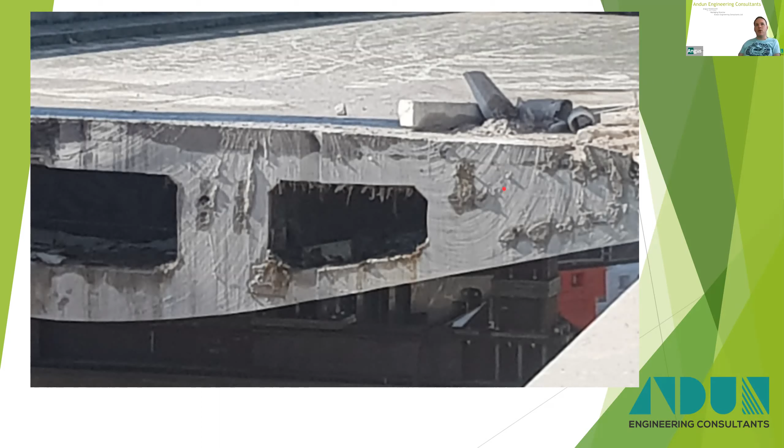So that was a close-up of one of the ducts and tendons on this bridge, which is Churchill Way, which we're going to do a specific case study on shortly - not shortly today, but shortly as in coming weeks. The ducts, and there's 8 in there, and then there was 3 over here in this section. You can't really see it from there, but take my word, this is a post-tension structure that was successfully demolished by slicing it into pieces and moving it with SPMTs.

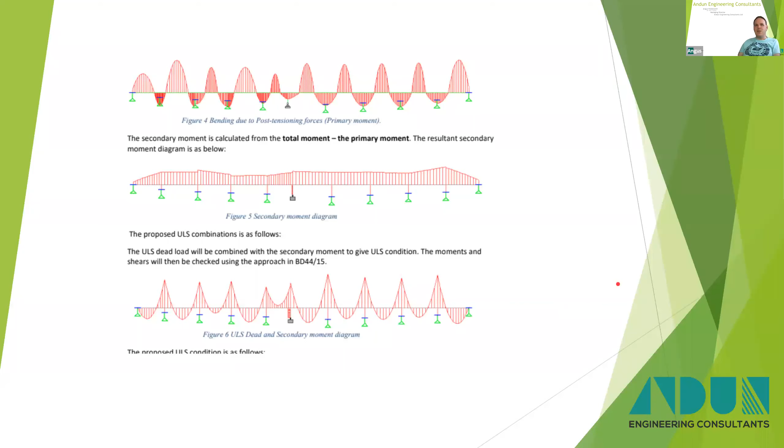The analysis can be a pain in the backside for those of you who've never had the pleasure of analysing post-tension structures or continuous post-tension structures. You get this weird creature of secondary moments, which takes a while to get your head around, but once you've got your head around it, it's not so bad. I say that, it's still bad. Post-tension structures are not my favourite thing, but they can be dealt with safely, and we have a track record of dealing with them.

Similarly, on the M4, this was Hunter Coombe, which was an absolute beast of a bridge that was continuously post-tensioned. This one had - I think it was these two spans, S and R - post-tensioned, and T, T1 and T2 were pre-tension beams. The difference being, with pre-tension beams you stretch the steel and then cast your concrete around it, so there's no grouting - the stresses are inherently locked within the concrete. Whereas with post-tension, you cast your concrete form, put your tendon through, crank it up, and then grout it or don't grout it.

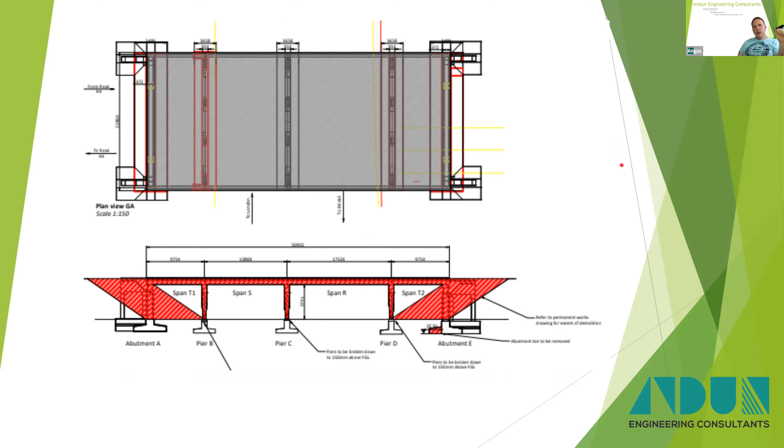This one, interestingly, also had transverse post-tensioning as well. Again, safely demolished by CDC - I think it was this year, it might have been last year. Again, that one was Sam Evans and Son on it before.